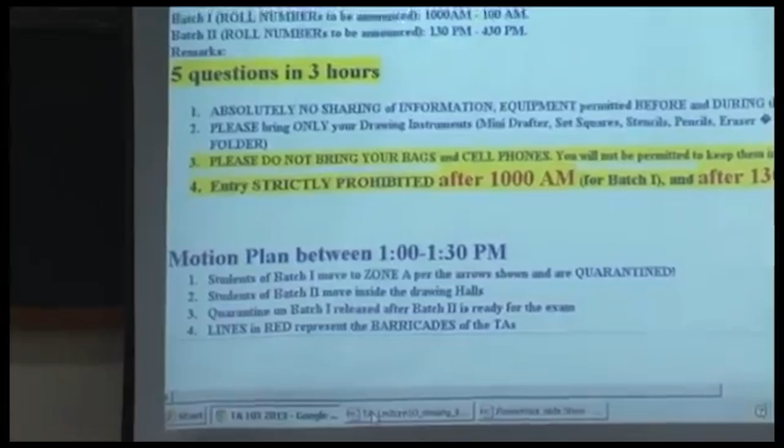Some exam details are now available on my website. Date is on the 22nd of February, 2013. The exam is going to be conducted in 2 batches, batch 1 and batch 2. I'm going to be announcing the roll numbers shortly. The first batch is going to be having the exam from 10 a.m. till 1 p.m. The second batch from 1:30 p.m. till 4:30 p.m. Okay. So these are the details.

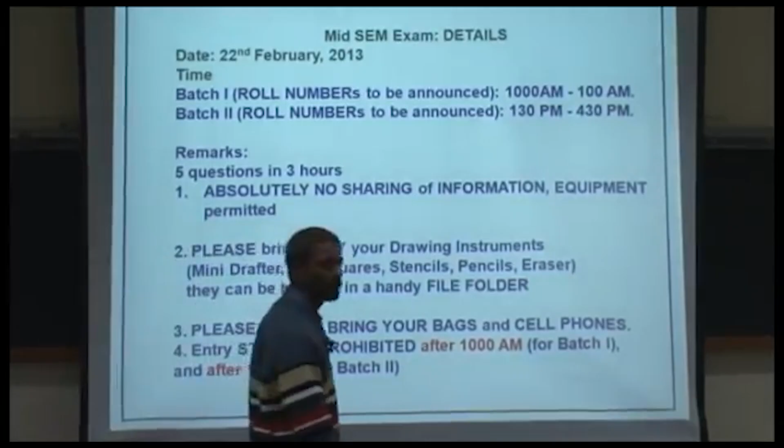So there will be 5 questions that I'll be asking you to answer in 3 hours. So far you have been doing 3 questions in 3 hours. In the exam, there will be 5 questions in 3 hours. Absolutely no sharing of information before or during the exam, because remember, the exam is going to be held in 2 batches. And most importantly, equipment. Okay? So no sharing of drafters, set squares, pencils, erasers.

I request you to bring only your mini drafter, your drawing instruments, set squares, stencils, pencils and eraser, a piece of cloth. They can be brought in a file folder or a simple polythene bag like this. Keep everything except for your mini drafter inside and bring this along with you. It's very important for you guys not to bring your bags and cell phones. You will not be permitted to keep your bags and cell phones either outside or inside the hall. Okay?

For batch 1, I want everybody to be inside the drawing hall by 10 o'clock sharp. Okay? 10:01, things become difficult. 10:02, things become more difficult. 10:05, 10:10, things become impossible. Don't do that. 10 o'clock sharp, I want everybody inside. For batch 2, likewise, I want everybody inside the drawing hall by 1:30 p.m. Capital S, capital H, capital A, capital R, capital P. Sharp. Okay?

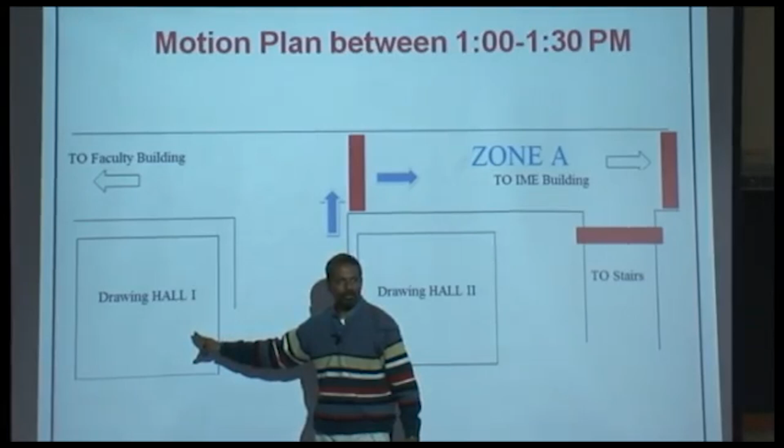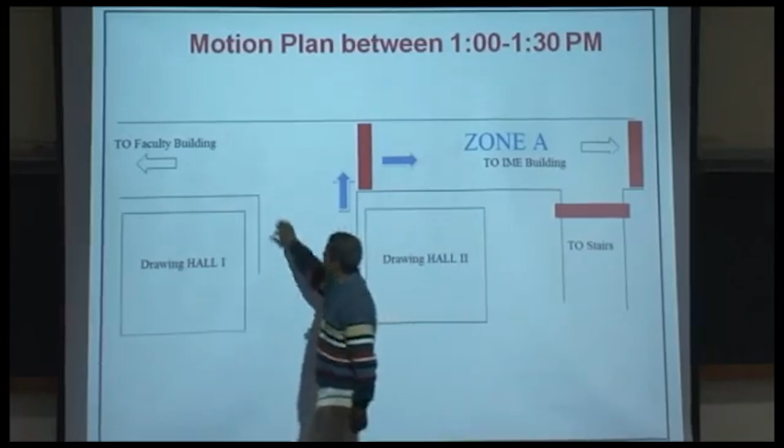Things will become a little difficult in between 1 and 1:30. Okay, so we have a plan. It's there on my webpage, but I just want to explain to you. Students from batch 1 will be working in drawing hall 1 and 2. Around 1 o'clock they'll come out. They'll follow the blue arrows. There's this corridor that you already know. The end on the left leads to the faculty building. The end on the right leads to the IME building.

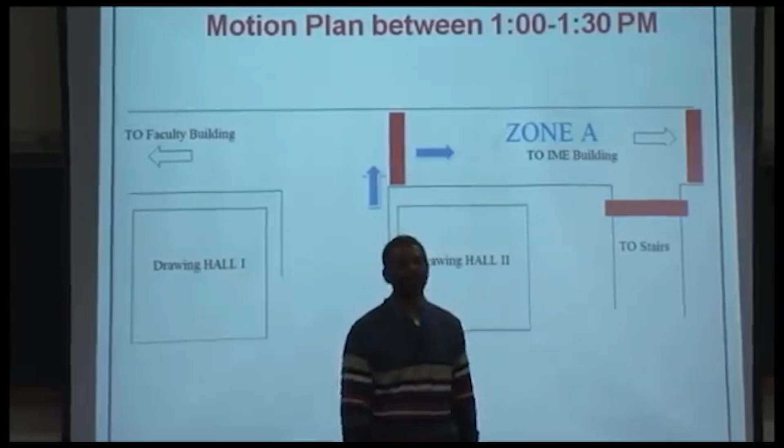So you guys in batch 1 will step out and turn to your right and stay here for half an hour. You will be quarantined, cordoned. Stay there for half an hour till pupils from batch 2 occupy their places in the drawing hall. By 1:30, batch 1 will be released, batch 2 will be ready for the exam. Okay?

These are the barricades. And we'll make sure that there's no mass transfer, momentum transfer, energy transfer across these barricades. Physics 102. Okay? No transfer of information.

So last time we did missing lines. This time we are going to do missing views. Those who are coming late, make sure you don't do that on the 22nd of Feb. Just by 30 seconds or 1 minute, the doors of the main drawing hall are going to be closed, and we can't do much. Okay? So make sure you're on time, or rather before time in this case.

So, little basics. The region in red, front view; the region in green, top view; the region in sky blue, right hand side view. Okay? Hinge lines. If you have a point in one of the views, what would its image look like in the top view and the profile view? Not necessarily a line, could be a point, and could be a line.

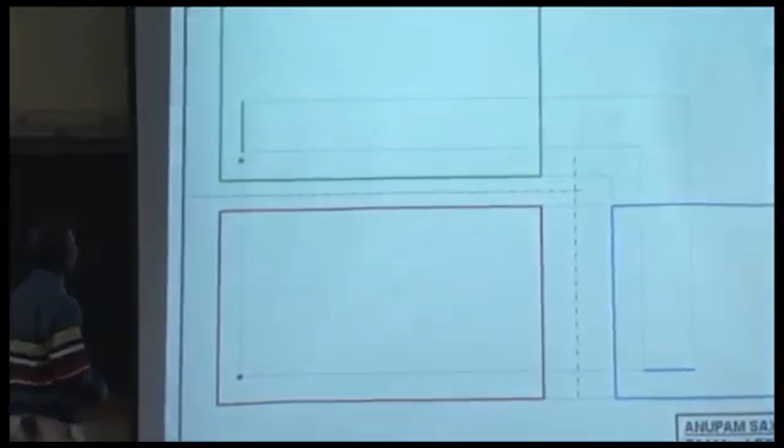This is true for all image planes or all views. For example, if you have a point in the top view, and if its image is a vertical line in the front view, if you take the image in the profile view, it's going to be a vertical line. Okay? Likewise, if you have a point in the profile view, in this case the right hand side view, and if its image in the frontal view is a horizontal line, you take the respective projections and you'll see that the image of that point in the top view is also going to be a horizontal line. So far so good?

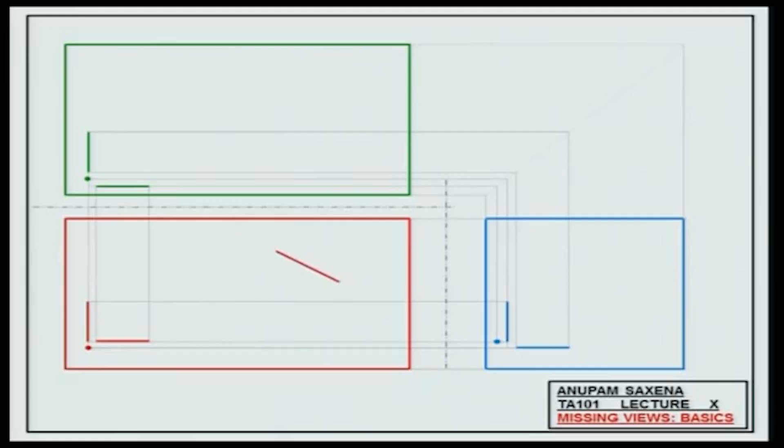If you have a slant line in the front view, and if its image in the top view is a horizontal line, then what do you expect? A vertical line? Wunderbar. If the image of that line in red is another slant line in the top view, what do you expect? Slant line. So these are certain basics that you have to keep in mind.

If there's a line which is vertical in the top view, and if its image is also vertical in the front view, what do you expect? The image of these two lines. Huh? What do you expect? Break this down.

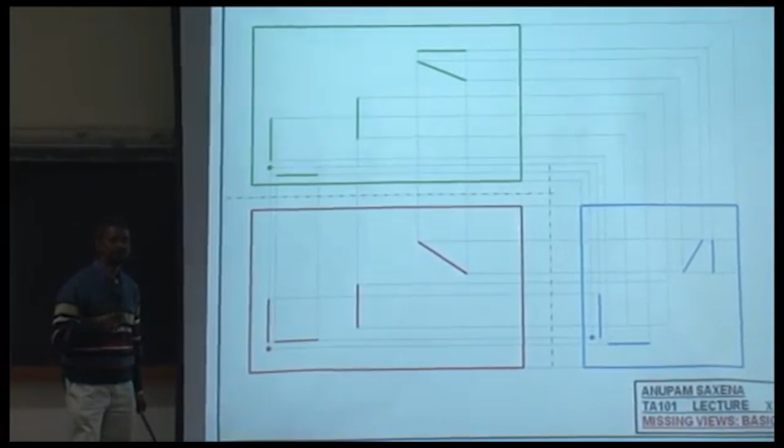Consider a point on the line. Okay? The image of this point is this line. Figure out the corresponding image over there. Consider this point. Image of this point again would be a line. Figure out the corresponding image over there. And do the other way around as well. This point, this image, this point, this image. What do you get? You would get a rectangle. Okay? So this is something which is important.

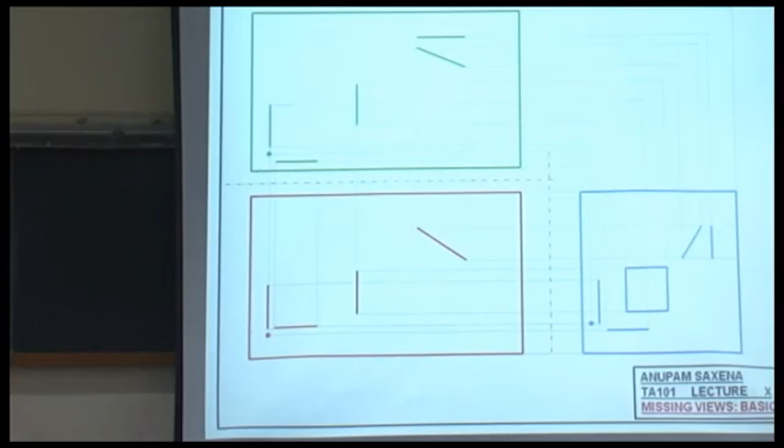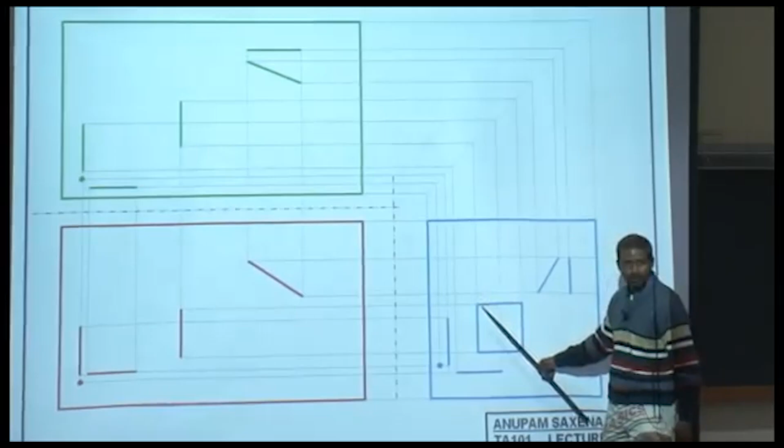So both are possibilities. So some of you are saying that this diagonal is also a possibility and this diagonal is also a possibility. Right? Do you agree? Good. So what does that mean? The solution is not unique, which makes things even more challenging when you are thinking about missing views. Okay, I will come to that. But for now, let's stick with the rectangle thing.

So given information of a point or line in two views, their projection in the third view should be possible. May be unique, may not be unique, depending on the situation. Okay, but it should be possible. All right, I will try to use this information to construct the missing view and alongside the three-dimensional object.

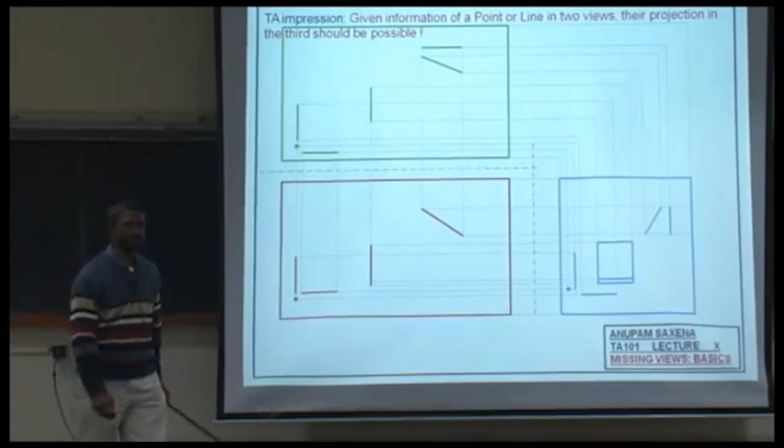Just in case, let's say if I extend this line by this little bit, the image of this line is also this green line. If I take the respective projections, I'll get another plane in the profile view. Okay, so uniqueness is something that we'll have to address while constructing the missing view as well as the solid.

Let's take this first example. Two views are given, the front view and the top view. And when I say two views are given, I mean that nothing is missing in the two views. The entire information is given. What is not given is the third view. Okay? And we have to draw that. So while I am going to be drawing the third view, I'll also be drawing the three-dimensional solid that the three views would represent. Okay, so here we go.

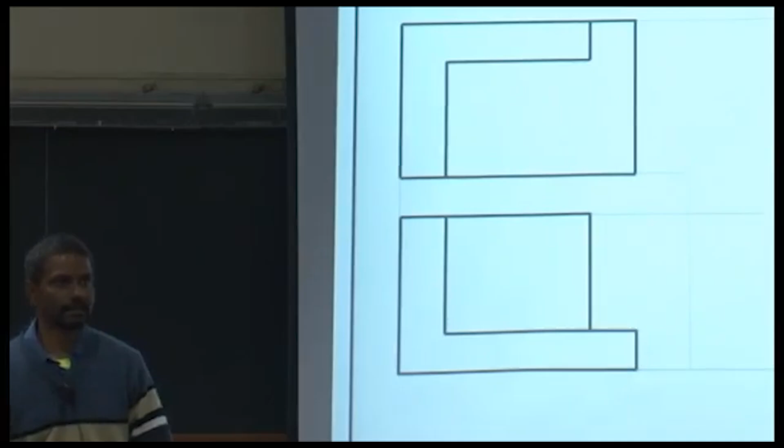Look at this figure carefully. You can think about this figure as being divided into a bunch of lines and points. Likewise, you can think about dividing this figure into a bunch of lines as well. Let's focus on this line and this line. So these two lines would represent what? Assuming that we're not thinking about the diagonal lines as of now, that would represent the plane. And that would represent the plane on the back side of the object. So this is what the plane is. Right? Okay?

So if you're with me, say yes. If you're not with me, raise your hand and feel free to ask a question.

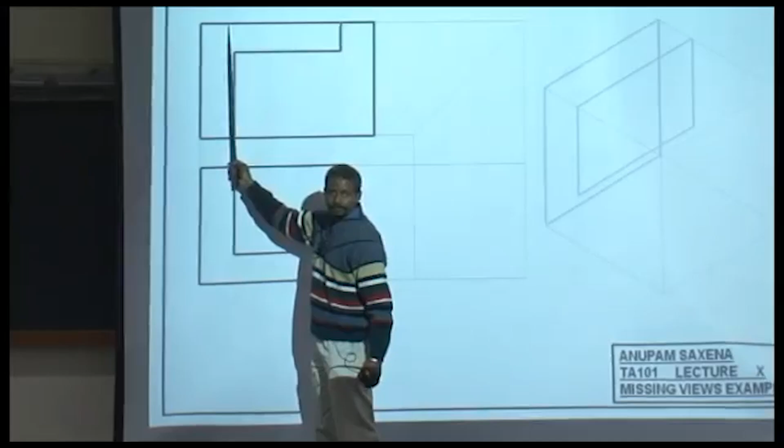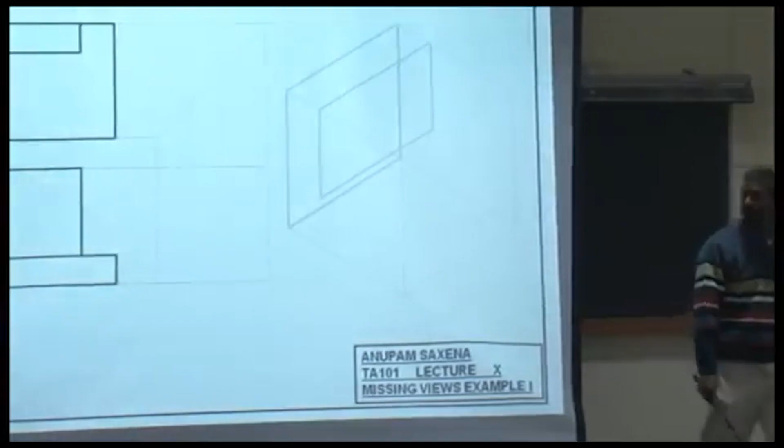Okay, how about this line and this line? You'll also get a plane. Okay, now what I've done is I have drawn the extended plane. So I've assumed that this line extends up till this point over here, just to get the solid in perspective. I've drawn this plane so that the plane extends till this edge. Okay, how about this vertical line here and this vertical line here?

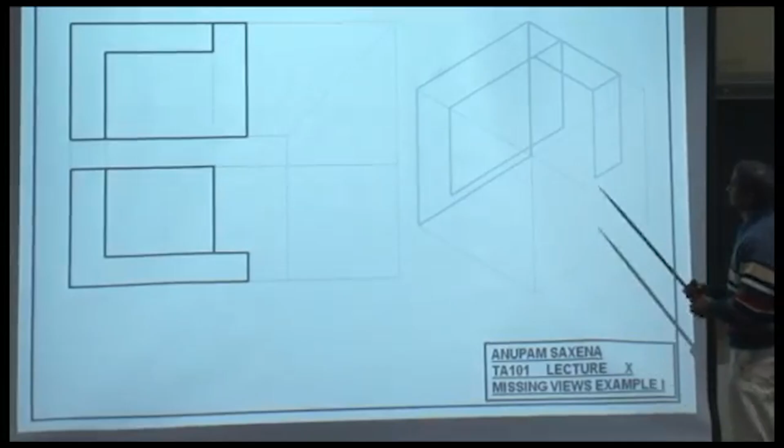I'll get this plane. Okay? Okay? And then this edge is something that I see in the top view from here to here. This edge is something that I also see in the top view from here to here. This bottom edge is the same thing. I see this in the top view, and also I see a part of this in the front view.

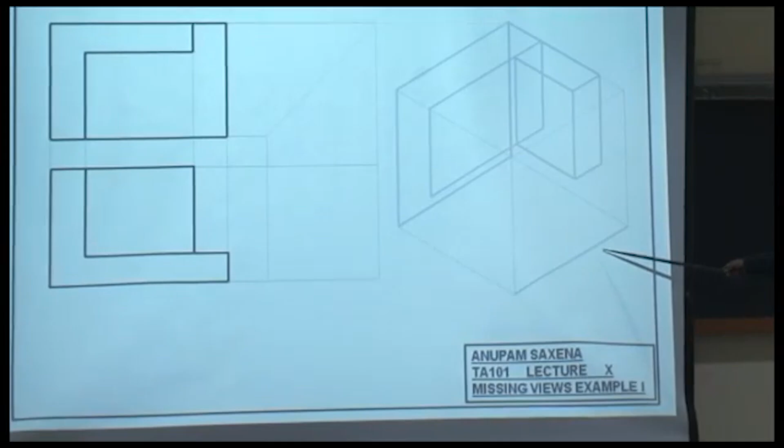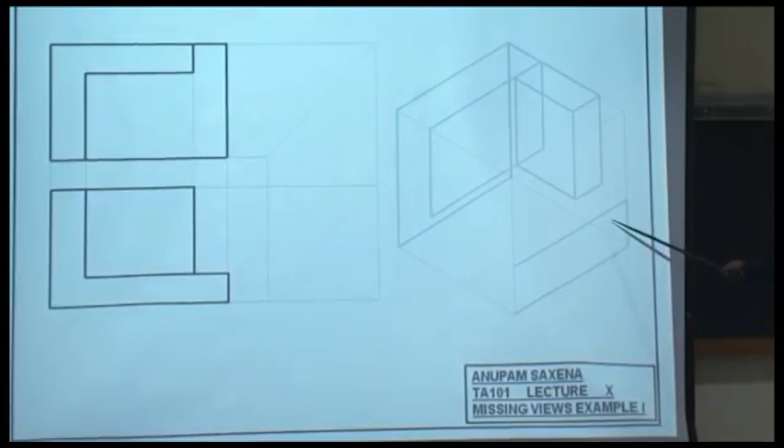Okay. This vertical edge I see in the front view. Right? Top view, right vertical edge. Front view, the vertical edge on the right. Top view. This is again the front view. Okay? Okay, at this point you have some information as to how the solid might look like. Okay? Use your judgment and try to finish the solid.

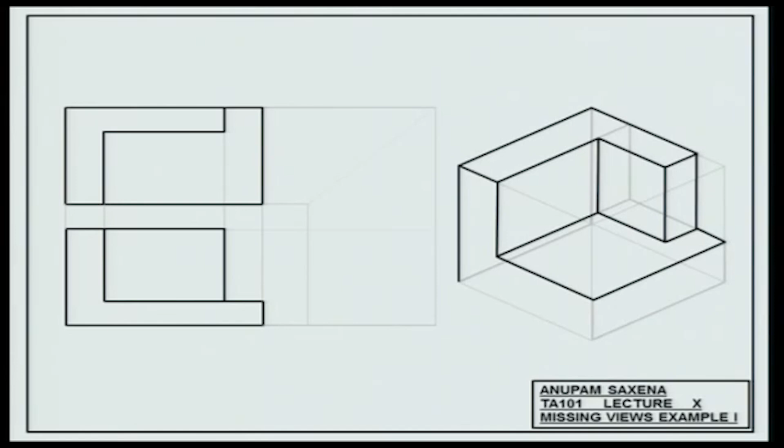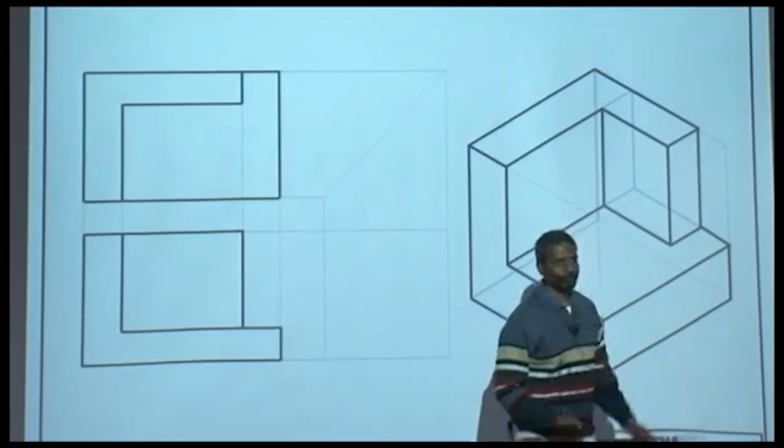This is how the solid might look like. Okay? Once you know how the solid looks like, you get the front view when you look at the object along this direction, you get the top view when you look at the object from this direction, and the right hand side view is from this direction. Okay? You are ready if you're convinced that the front view and the top view shown correspond to the object that you have drawn. Okay? You're ready to draw the right hand side view.

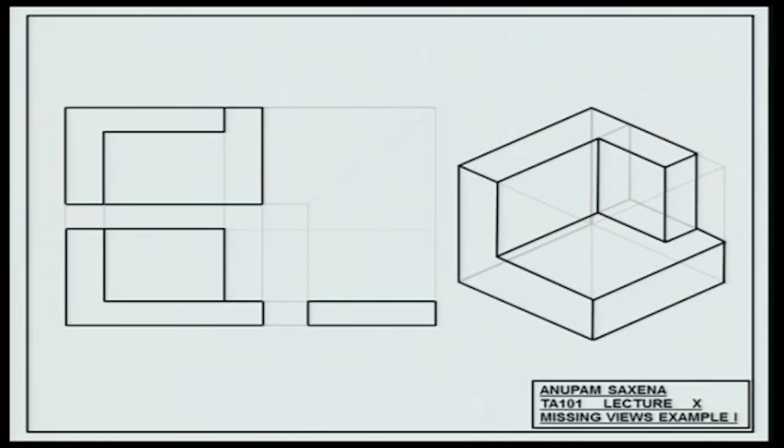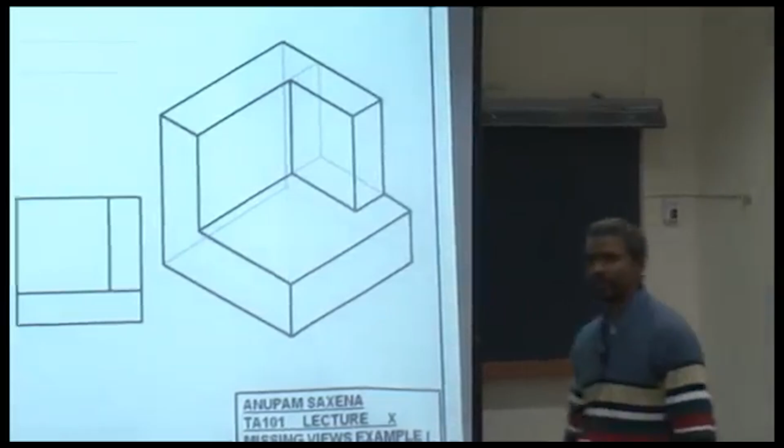Use projections. You would see this face. You would see this face. You would see this face. And then you would see this face. Okay? Things can get tricky, so you'll have to be a little careful. Okay? Another way to think about this.

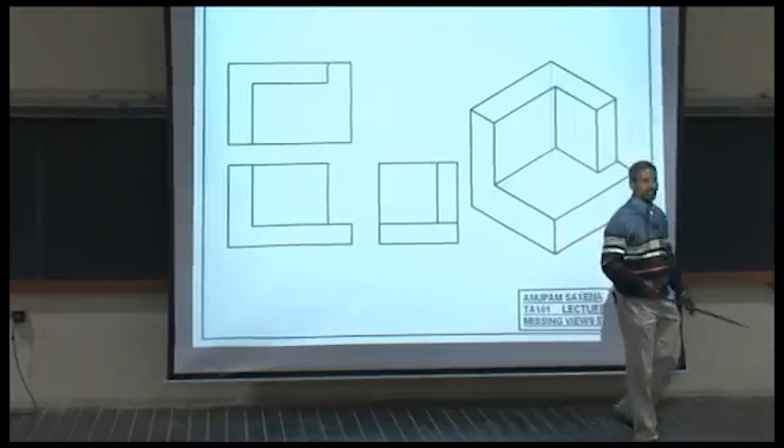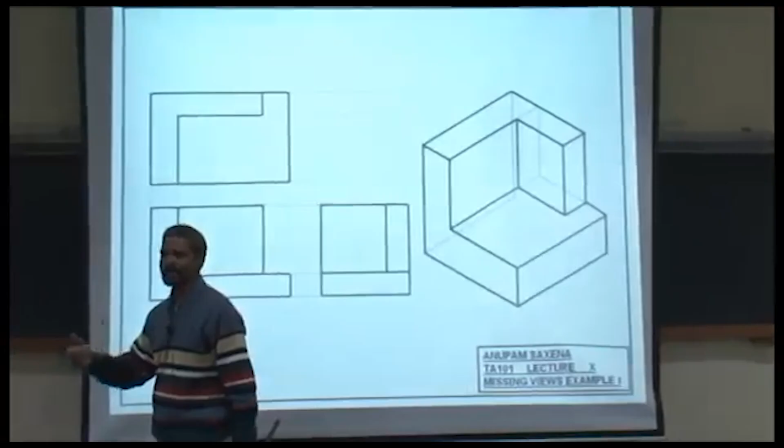Start with a three-dimensional block. Assume that's solid. And depending on what your views depict, start cutting different parts from that block. Okay? That's the other way. So assume that you have a clay box or a box made of wax. Start cutting different parts from that till you get your top view right, your front view right. Okay? Once you're convinced, then you are ready to draw the profile view or the third missing view. Okay? So it's experience, essentially. There's no method that is the right method. So it's experience that's going to help you draw these objects.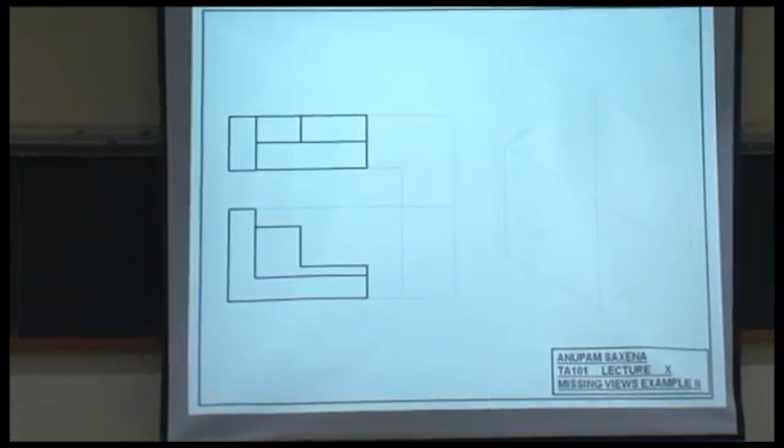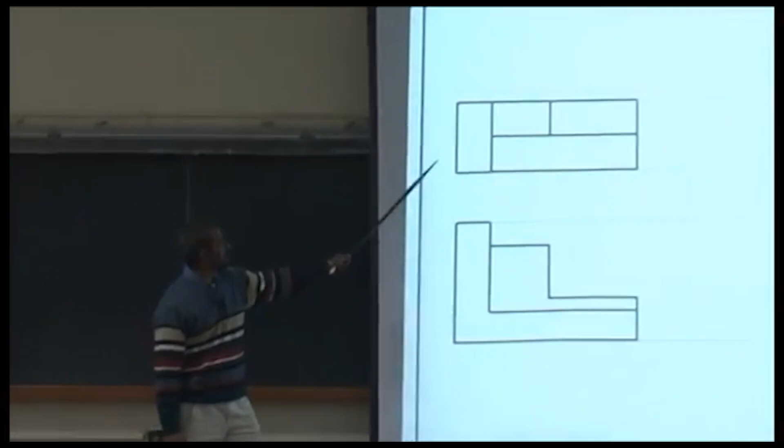Example 2. The front view given, the top view given. Okay? Use the fact that the image of two vertical lines in the two views will be a plane in the third view. Use that fact. Corresponding to this line and this line, you'll get a plane at the back. Right? So when you agree, say yes. Okay.

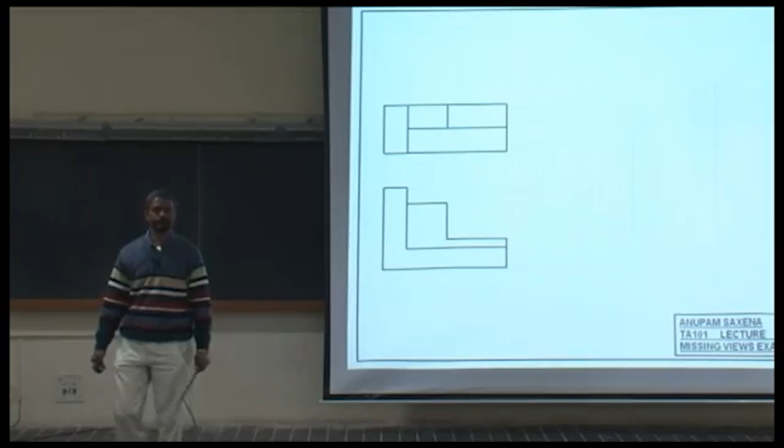Corresponding to this line, how many lines do you see here? 2. Is it? Yeah? 1, 2. How many planes do you expect? So the image of this line is this guy over here. The image of this line is also this guy over here. And by the way, this is also discretized into two vertical lines. Right? So how many planes do you expect?

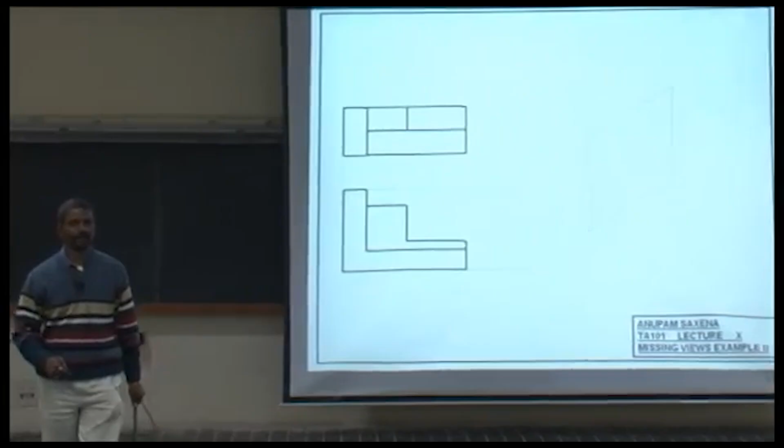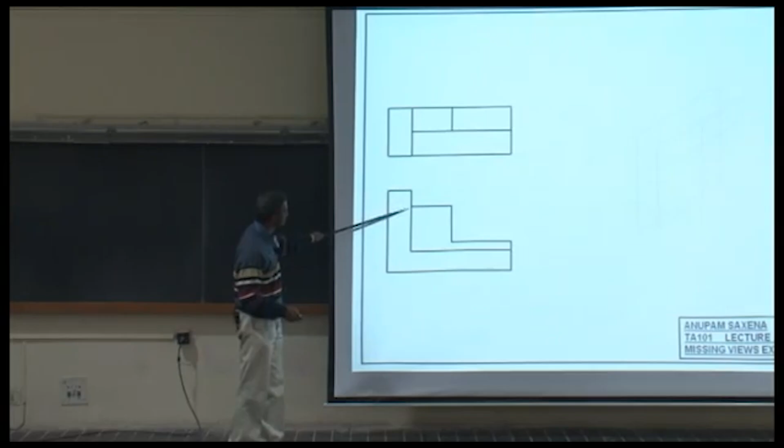For now, let's say there are going to be 4 planes. This is the first plane. Okay, that would correspond to this line here and this line here. Second plane corresponding to this line and this line. The third one corresponding to this and this. And the fourth one corresponding to this line and this line. Okay, what would this plane correspond to? This and this.

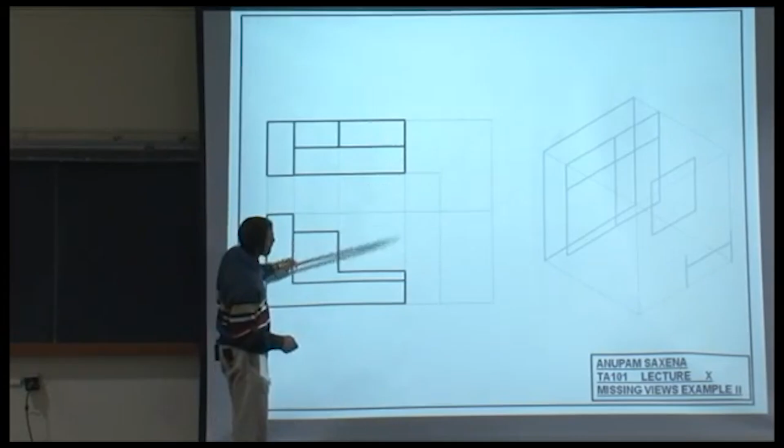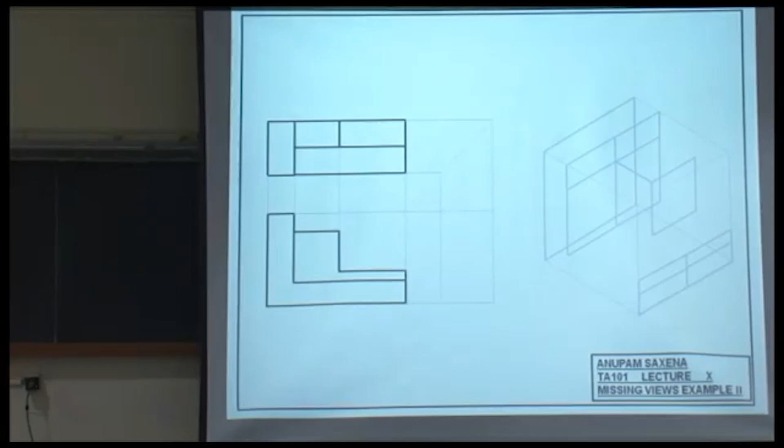How many planes do I expect here and here, or these planes? Yes? Okay. Do I see this line in any of the views? Top view? Do I see this line? Top, front? Rather both. Okay? Do I see this line? Do I see this? Do I see this?

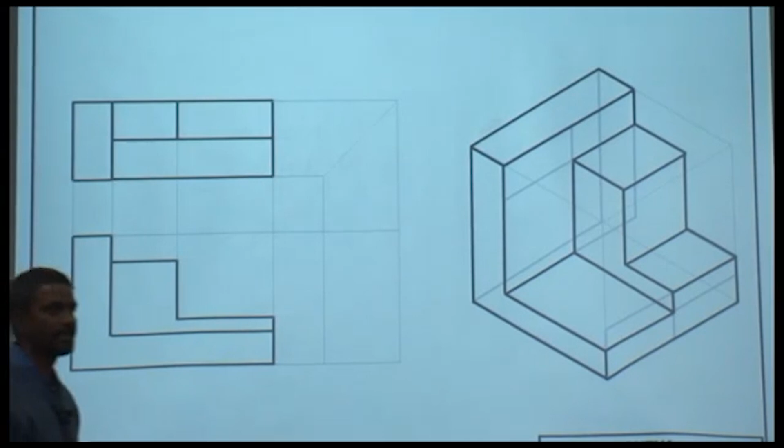Finish your object and now try to sketch or try to outline the object in 3 dimensions. And your object will probably look like this. Yes? Simple, is it? Okay. Good. So once you have this object, now you're ready to draw the missing view, which would look something like this. Yes? Good.

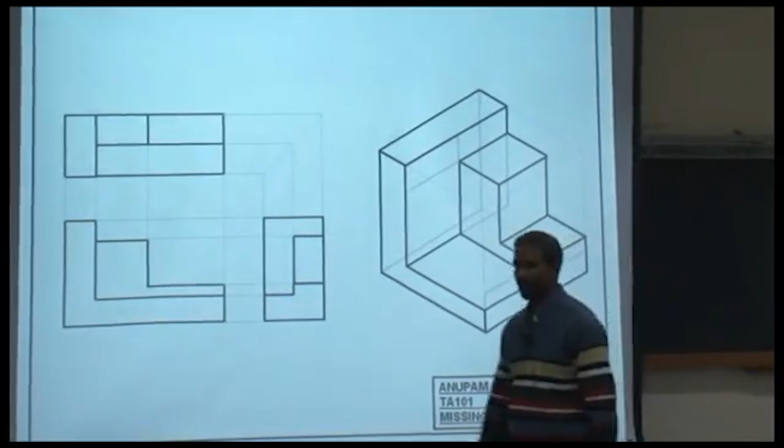So far so good? Let's think about loops. A loop is, what is a loop? You know what that is? Let's think about loops. How many loops are there in the front view? How many loops are there in the front view? Well, actually, mathematically there are 3. But for now, we'll assume that these loops are not intersecting with each other, and one loop is not enclosed in the other loop. Okay?

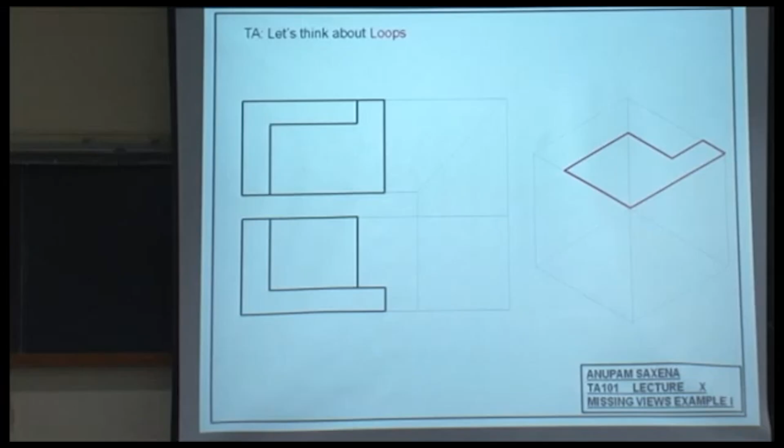So this is the loop that you see in the top view, this guy here. This is the loop that you see again in the top view. This is the loop, the L loop that you see in the front view, and then you see a rectangular loop again in the front view. Okay? Now the problem is just to place these loops appropriately in 3D. How do you do that?

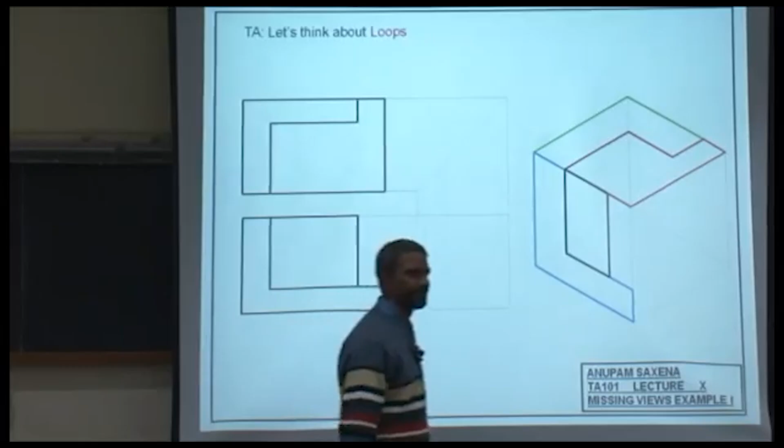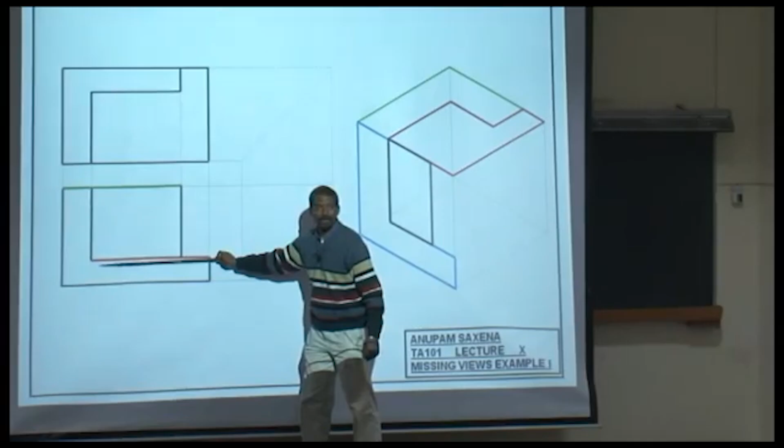Let's see. So this is where the green loop is. This is where the image of the green loop is. So the green loop is here in the top view. The image of this is at the top in the front view. So this loop stays here. The red loop, okay, this loop, the image of this is over here in the front view. Right? So this loop, what happened to it? It'll go down.

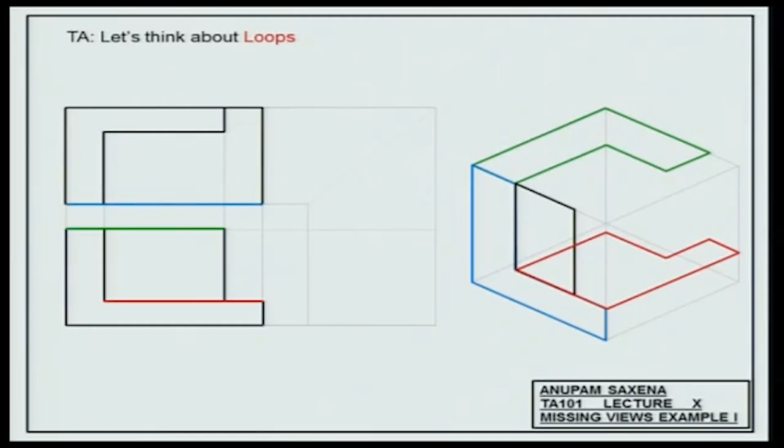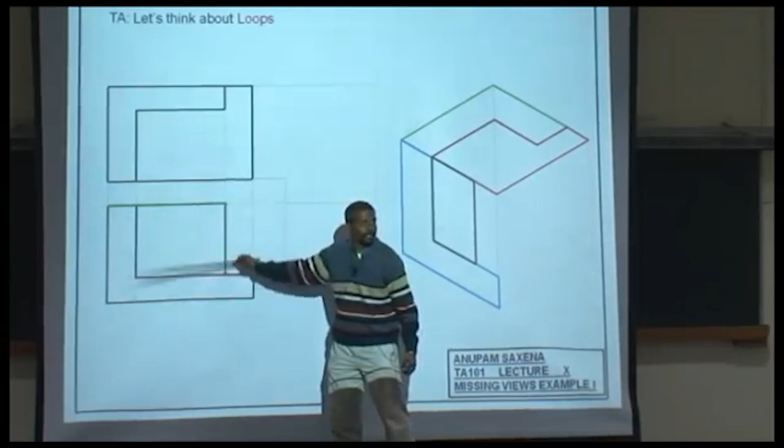Okay? The image of the sky blue loop in the front view is at the bottom in the top view. Okay? Explain why did that red loop go down? This is your red loop. What's the image of that in the front view? This line here. There's a difference in height between the green loop and the red loop. So if the green loop is staying at the top, the red loop is going to be pushed down. Right?

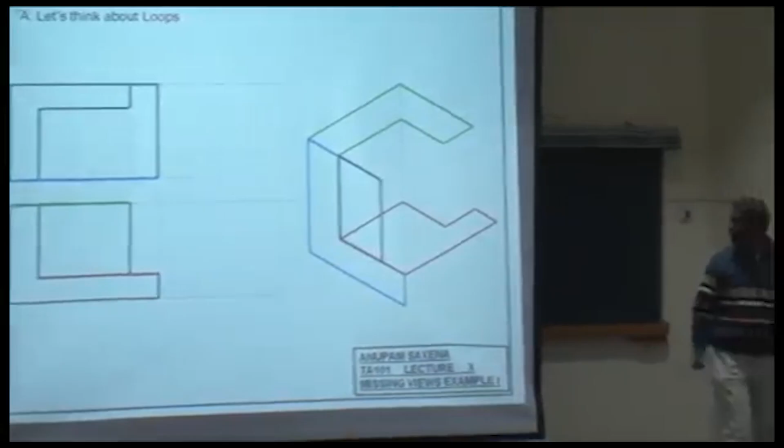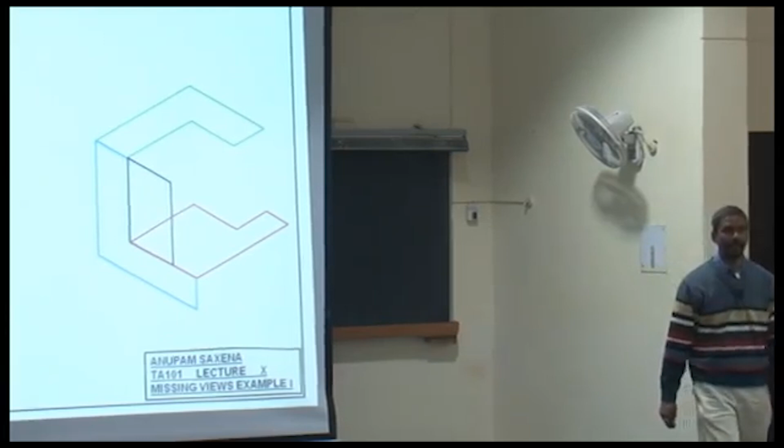This is your sky blue loop. The image of that is here in the top view. So this sky blue loop will stay there. How about this loop? Will it stay there? Will it get pushed? Along which direction? So these loops, they represent different faces of a three-dimensional object. So what you have done is you have determined their relative placement in 3 dimensions.

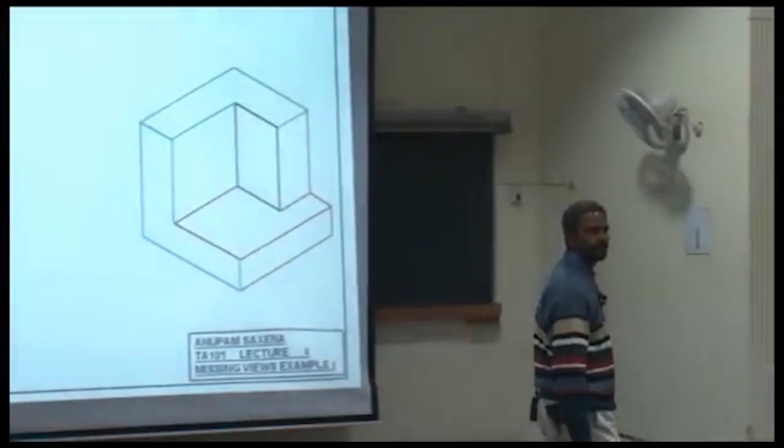Okay? Once you have done that, all you need to do is draw the missing lines. Right? Simple? Again, once you know the object, you know the missing view. Okay?

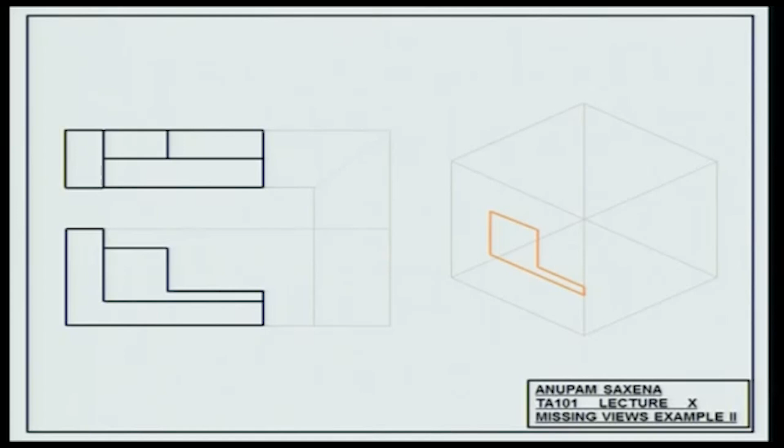How about this? How many loops do you see in the front view? 2. One of them is the one in the light brown. So these are 2 loops that you see in the front view. Correspondingly, in 3 dimensions, they are where they are placed. In the top view, how many loops do you see? 1, 2, 3, 4. Fine. You need to play with them. You need to push them back and forth, down and up.

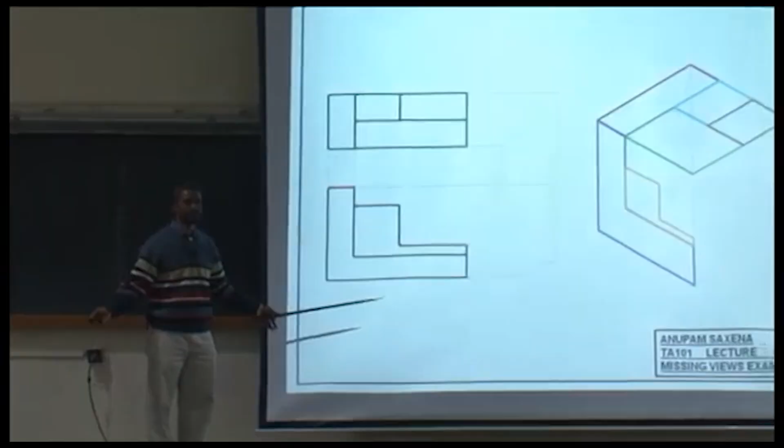This is where your red loop is. It stays at the top. Your sky blue loop, this one, gets pushed down by this height. Okay? The brown loop gets pushed further down. The purple loop stays where it is. The light brown loop gets pushed along this direction.

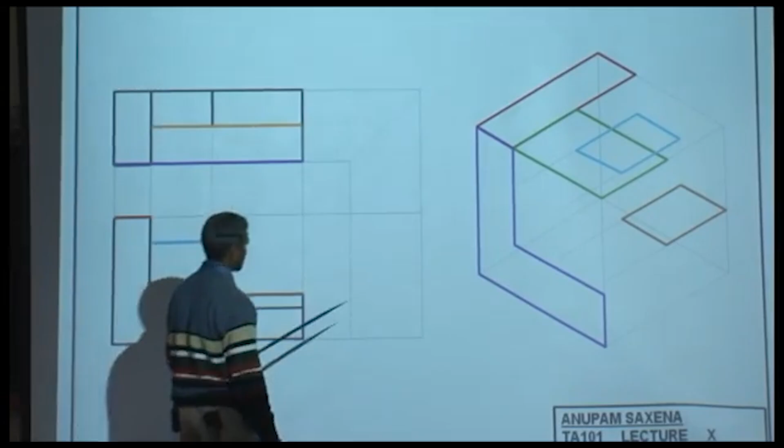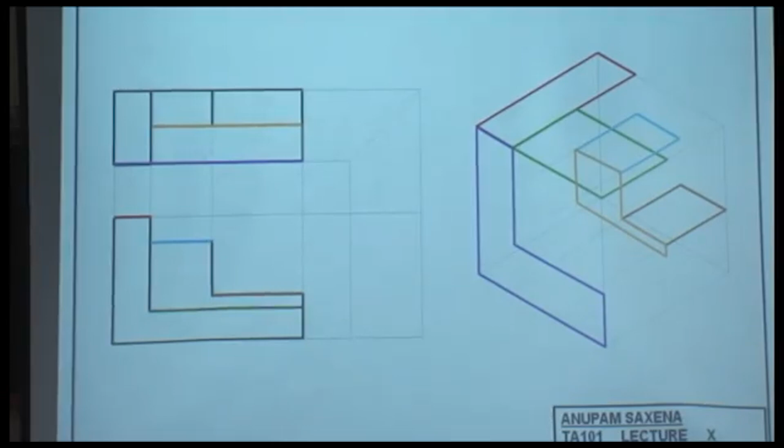Okay, once you have placed these loops appropriately, fill out the rest of the lines. The green loop. The green loop comes down. Now fill the rest of the lines. Complete the rest of the lines. Once you know the object, you know it's 3-dimensional, you know its third view.

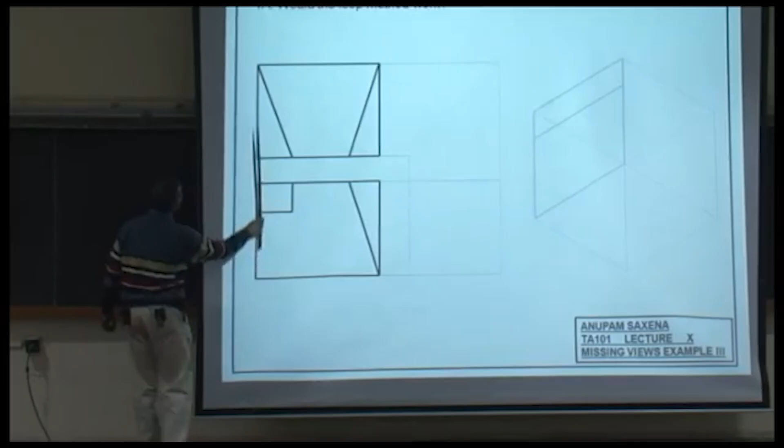Given 2 views, this is a little tricky and challenging. Would the loop method work here? Anyhow, let's do conventional stuff. This plane corresponds to which 2 lines? This line here and this line here. And this plane corresponds to this line, this entire line, and this line at the back. Likewise, the plane here on the front corresponds to these 2 lines. Right? With me?

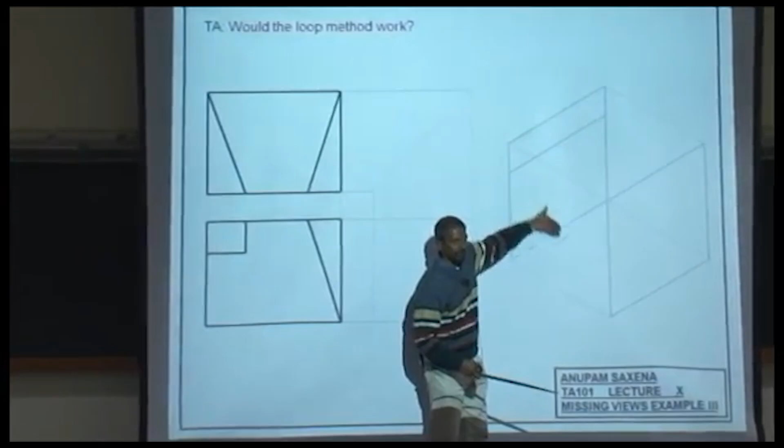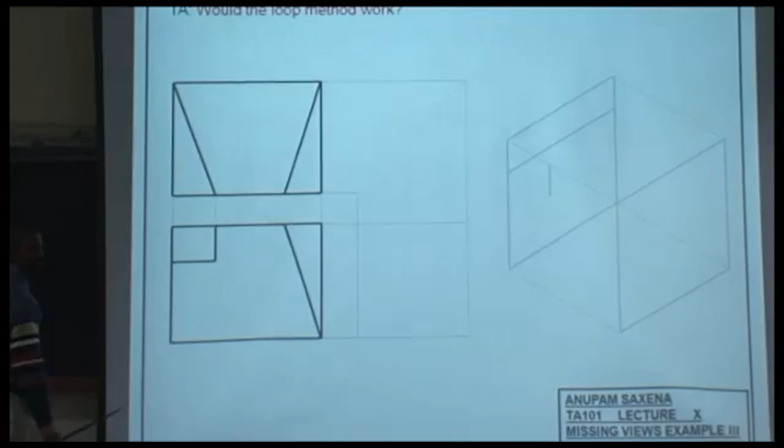Good. So this is your plane of the front view. This is your plane of the top view, of course, and this is your plane of the profile view. In the front view, you would possibly see a line here. Essentially this space here. And then you would see something like this. This is the tricky part. This is something that you will probably need to guess.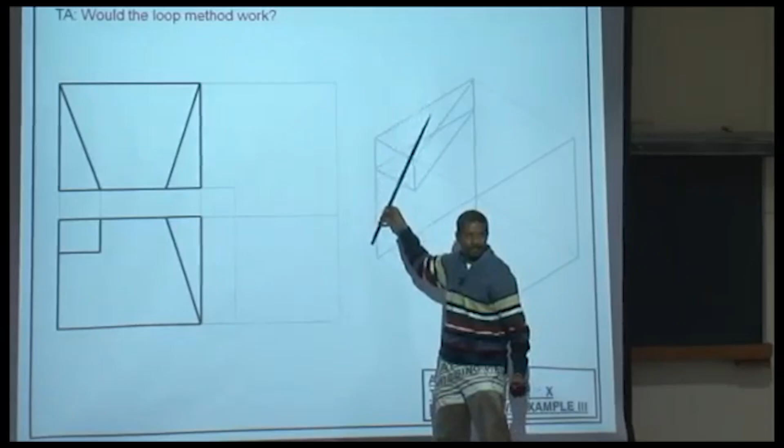If you look at the solid from here, you'll see this line, this line, this line, and this line. But if you look at the solid from the top, you will see this triangular wedge taken out from the block, corresponding to which you have this triangular feature here. Now how about these 2 triangles? It's a plane. It's a slanted plane. Are you sure? No, sir?

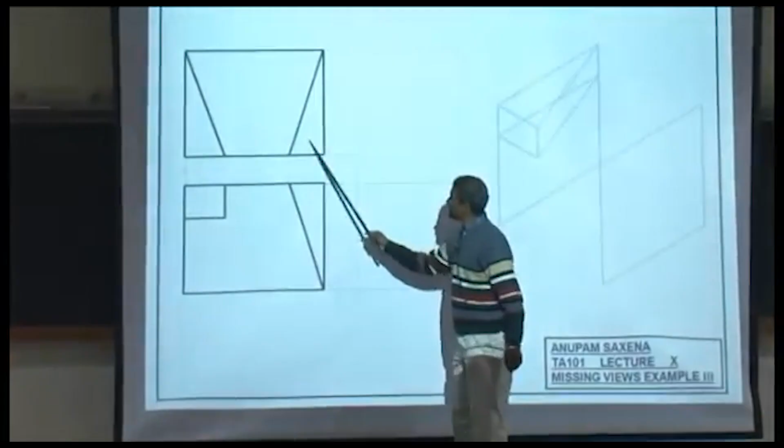Well, if it is a set of planes, if there are like two planes, then there has to be a line of discontinuity between those planes. That line is the diagonal of the square. So what you're saying is these two triangles will constitute two planes.

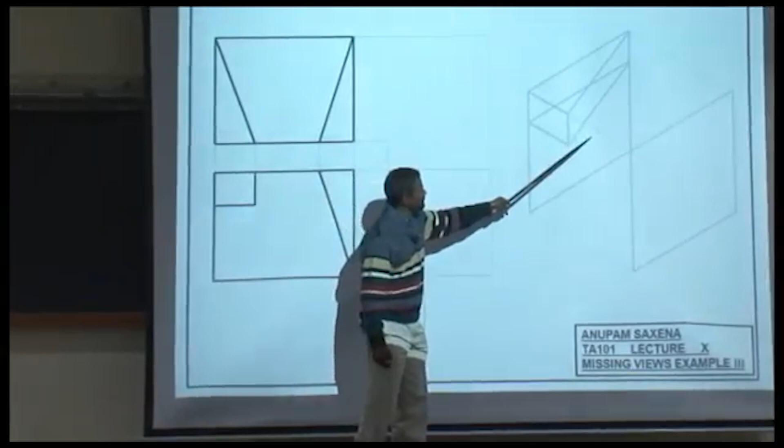Huh? Try it out. Try it out. But let me go with your option first. A single plane, a slanted plane. Okay? So one of the vertices of that plane will be somewhere here. The second vertex will be here, and the third vertex will be here. Correspondingly, the second vertex will be here, the third vertex will be here.

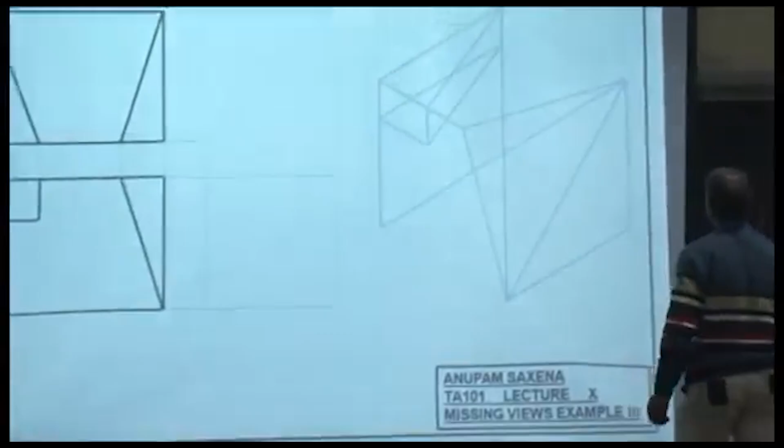Okay? Now imagine that you're working with this. Imagine that you have drawn the solid. Now try to verify if you get the projections in the front view and the top view right. If you do, the solid is okay. The line I was talking about was this line. Was which line? The diagonal. This line here. Okay.

So remember this golden rule, that if you're getting two planes, or if you're getting a single plane with 4 points lying on the plane, make sure that all 4 points are coplanar. Otherwise, you're not doing things right. Okay? Once you get the sense of how the object is going to look like in 3 dimensions, work out the outlines. Once you know what the object looks like, work out the third missing view.

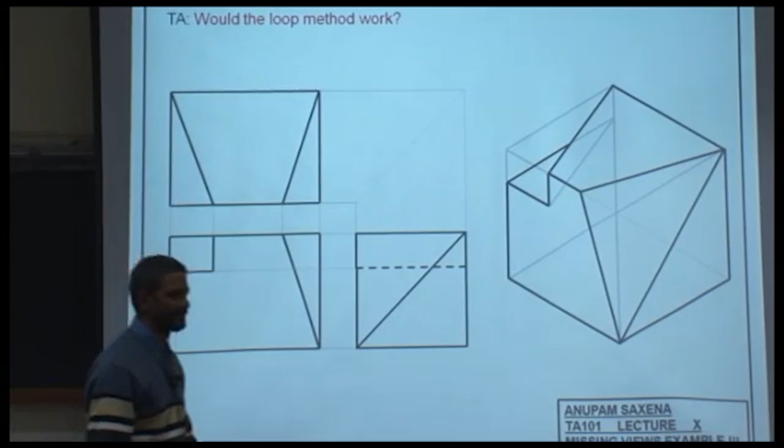Let me tell you, and let me warn you rather, that this is not at all trivial for certain cases. For certain cases, straightforward, but for many other cases, it's not trivial. So you have to give your CPU a hard time.

Yeah? So I think there should be another solution to this, because of the diagonal you drew over there. Let me. Yes, sir, this one. Instead of drawing this diagonal, if you take the fourth corner of the square and you join the 2 points, yes, these 2 points, then there would be 2 planes, and there would be a line of discontinuity. But would the corresponding line appear over here?

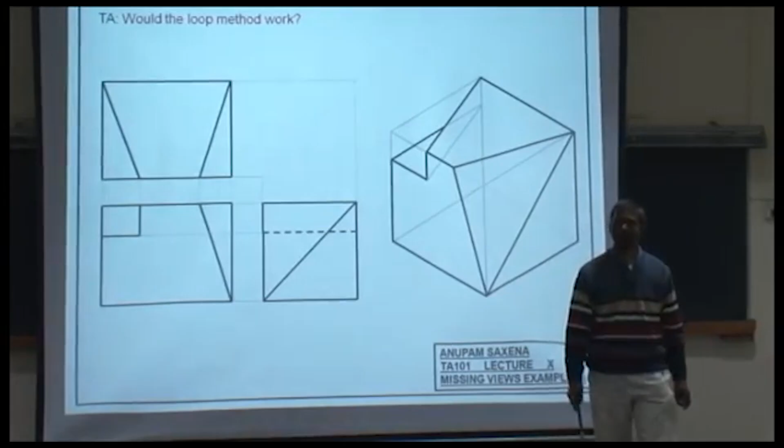Yeah, absolutely. You're most welcome. Instead of having this line over here, I can join these 2 points over here, and then I have 2 planes. One would be this one, and another would be this one. So this line won't be visible in these 2 images because it would be hidden behind these 2 lines.

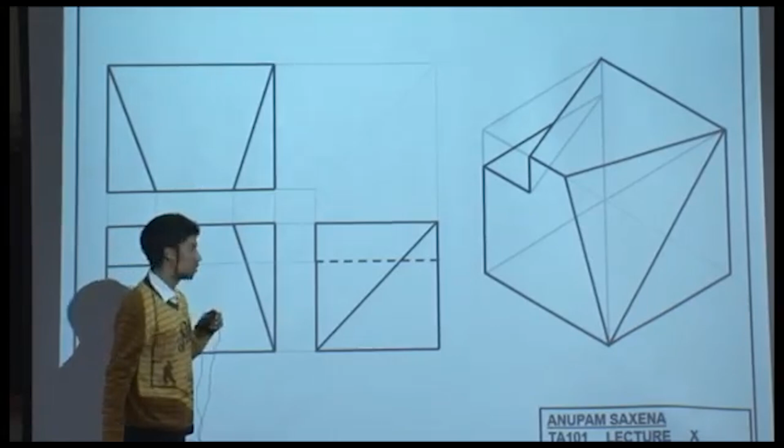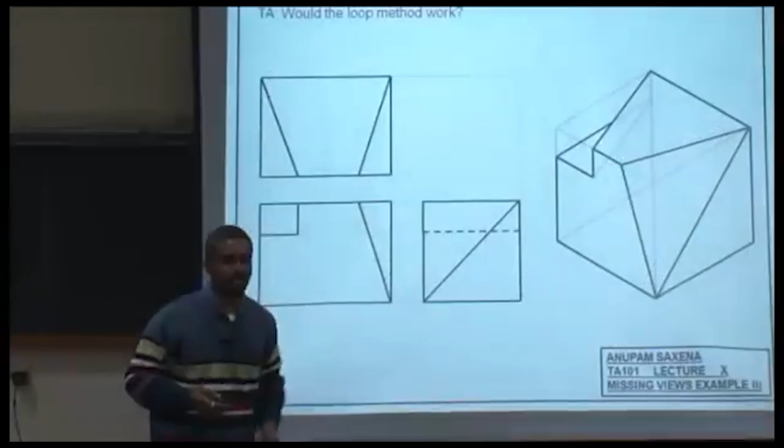How about the hidden lines then? So the hidden lines would be behind these 2 lines. Are you sure? Try it out. Try it out. So there could be multiple solutions. So try it out. And do verify if the loop method would work in this case.

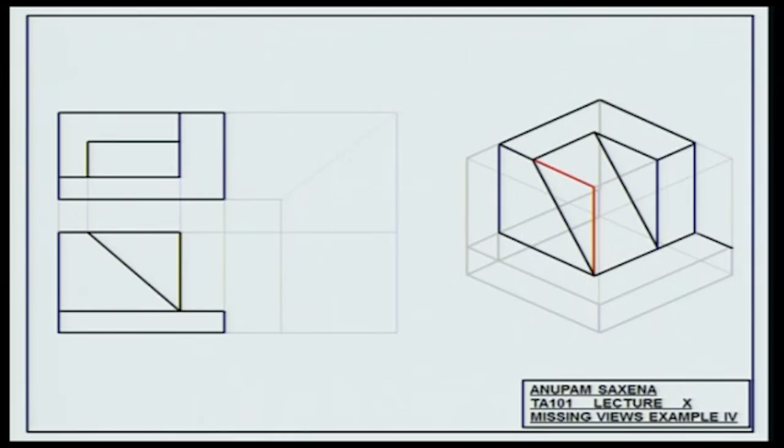Another example. So this time I won't speak, I'll let the screen speak. Okay? So just follow and stop me wherever you have doubts. Do you agree? Are you with me? Good. Okay, I'll talk about these red lines later. But for now, let me finish up the solid. Would those red lines be there? Spot on the money. Okay?

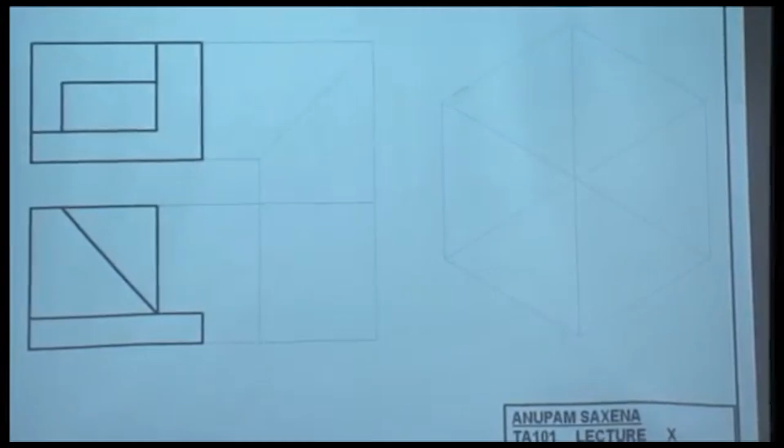Again, coming up with the third view is not so difficult. Okay? How about the loop method? You see the first loop here? Trapezium. Second loop, rectangle. Third loop at the top. Fourth loop again at the top. And then you have this rectangular loop at the top. Okay? And you have this triangular loop in the front.

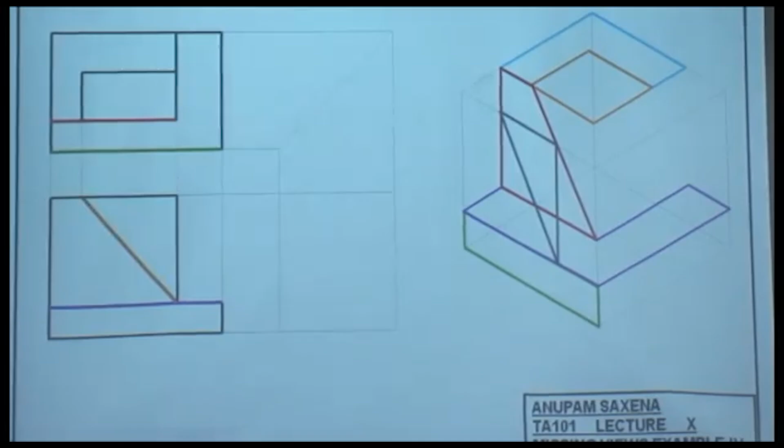Okay? The purple loop has to go where? Okay. The red loop has to go where? Yeah? Okay. The green loop, stay there? Okay. The brown loop, would it stay like that or would it change in shape? Like so? Okay. The sky blue loop stays there. The black loop here. Make sure you have the solid, and once you have the solid, you have the profile view.

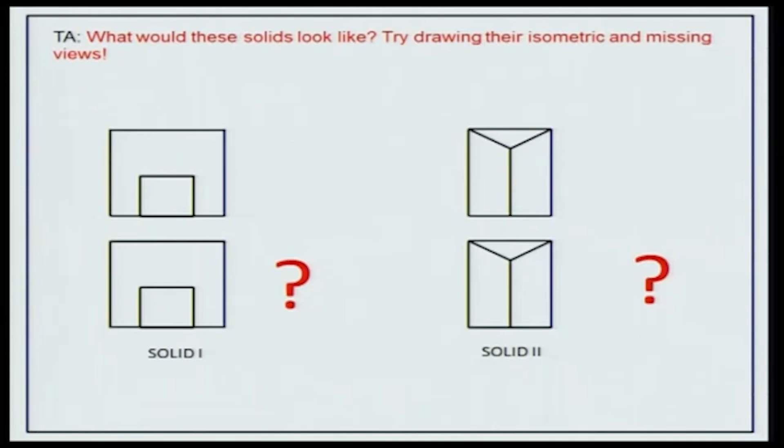Two problems before you go from here. On the left are shown the front view and the top view of solid 1. On the right are shown the front view and the top view of solid 2. They are identical to each other. Okay? And at this time, it does not matter if you're using a first angle scheme or the third angle scheme, since they are identical to each other. Okay? In both cases, try to find how the respective solids will look like, number one, and once you do that, try to find the missing profile view. Okay?